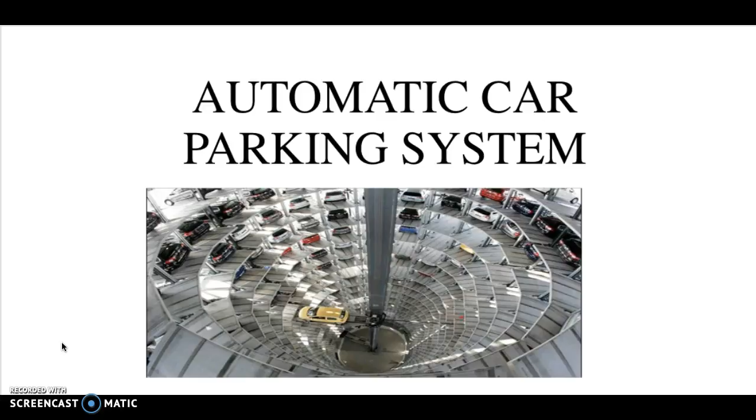Today my topic is automatic car parking system, which is useful for the present trend, and I want to go through the overview and the background.

In the earlier days there were different models like clamp, Parkism, multi-layers, used for parking, and it consumes a lot of space. The main motto of my presentation is I don't want to use a lot of space, just half the space is enough for a lot of cars.

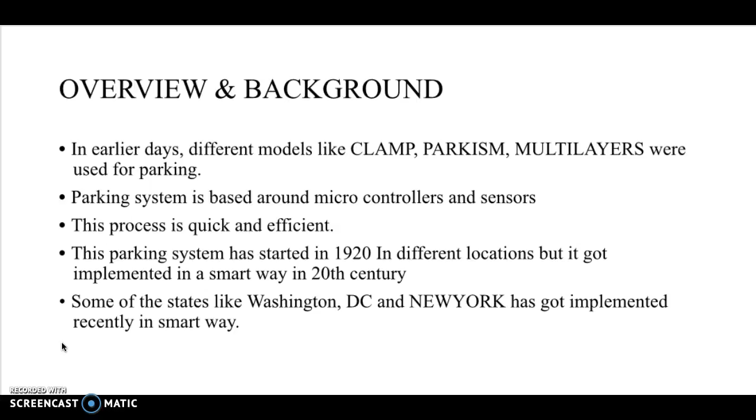This parking system is based around microcontrollers and sensors. This process is quick and efficient.

The parking system started in 1920 in different locations, but it got implemented in a smart way in the 20th century. But the automatic car parking system started just a year back, and it is slowly getting implemented now everywhere.

Some of the states like Washington DC and New York have implemented it in a smart way. If we talk about New York, it is a totally crowded area, so for sure it should get implemented, and it got implemented.

Organizations will be very happy with this parking system, because they are saving money. They're not taking a lot of space. Just half space is enough for them, and they can construct 5 to 6 floors. They can increase the floors depending on the space.

If you take some space, we can construct 5 to 10 floors. And if they have more money, they can construct more than 10 floors, and it is totally useful in the future a lot.

If you see some of the big companies like Microsoft, Wipro, Infosys, any company or university or organization, this technology is very useful for them.

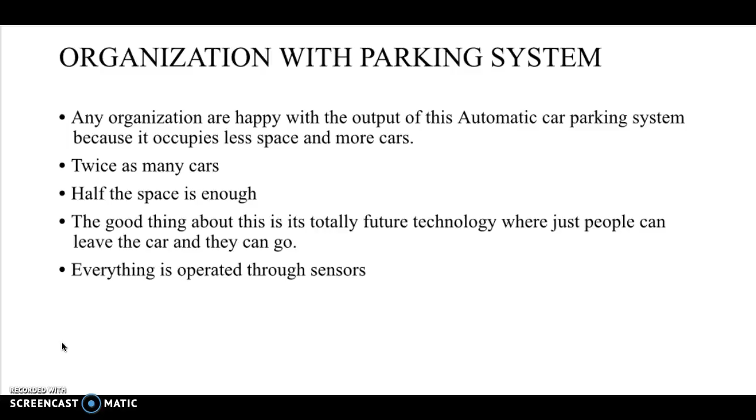It is time saving, and it will control the traffic. It is more useful for the customer who comes there. They will just park their car and go. So everything is done through sensors.

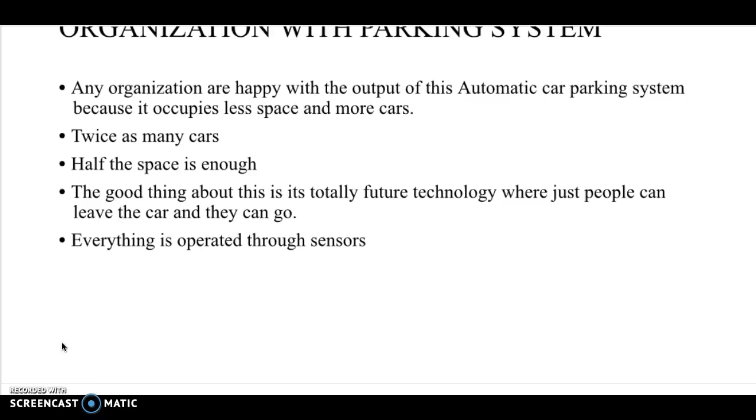I mentioned twice as many cars. If you take the ground level, only normal ground parking, we're taking a lot of space. So for that, only half space is enough, and we can construct more floors.

The good thing about this is it's totally future technology, where we can see some cars like Volkswagen Passat and BMW 7 Series which are totally automatic. This is the automatic car parking, so it goes through all the sensors and motors. Everything is operated through the sensors.

In the hype cycle, this now comes under autonomous vehicles, which will be reached in 5 to 10 years. For this, they will develop the implementation, the working and everything, and they should take the space and construct for everything. It will take almost 5 to 10 years.

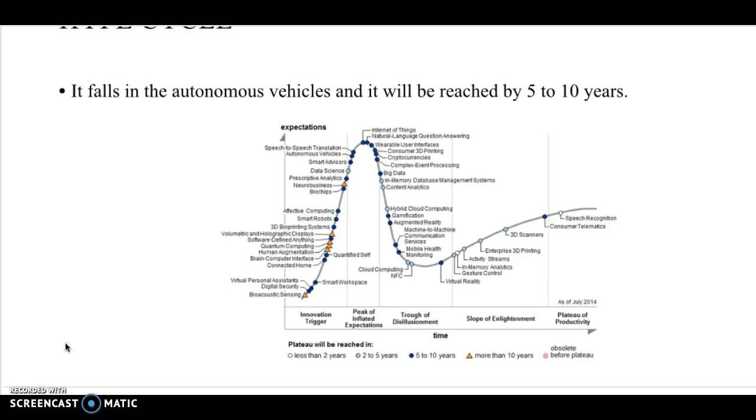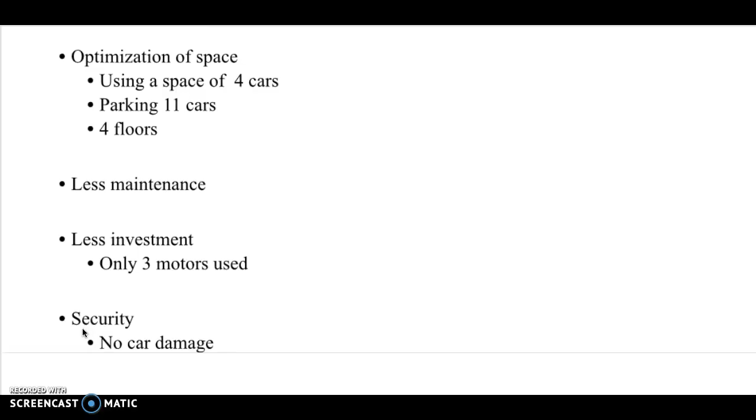If you're keeping any car next to another car, the car which is already placed should move to the empty space, and the car going to that position should move in. That is the reason we leave one empty space for the car. It has less maintenance, less investment, and only 3 motors are used.

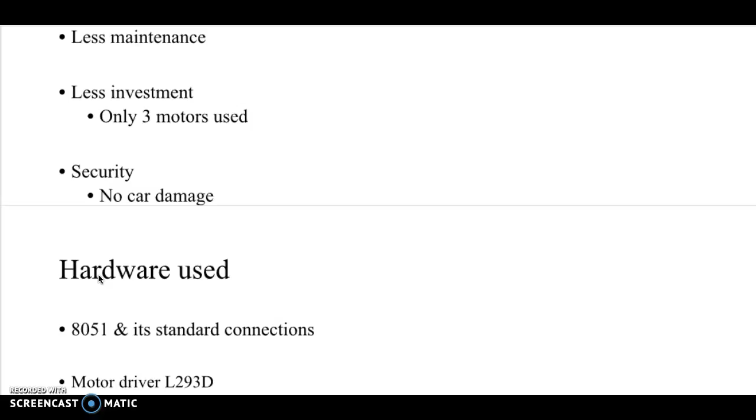Talking about security, this is the main term, because people will be worried that if they place their car and go, something will happen, like theft or car damage. Don't worry regarding that. We should not worry, because if the sensors or the motor fail, there is a backup for that. So no car damage.

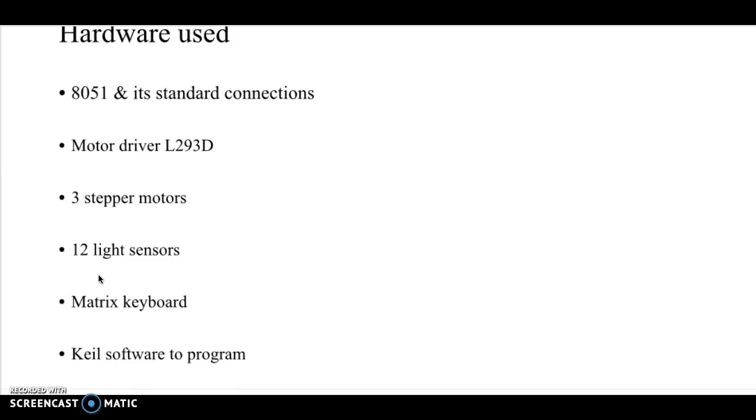Talking about the hardware, the 8051 microcontroller with its standard connections is used, along with the L293D motor driver, the latest one, 3 stepper motors, 12 light sensors, a matrix keyboard, and Keil software for programming.

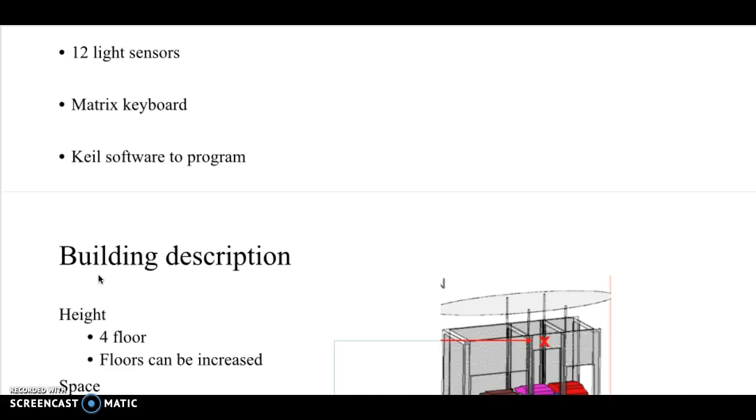This is the main software to run all these sensors, and if any malfunction occurs, this software is very useful. Coming to the building description, this is where the organization will be looking.

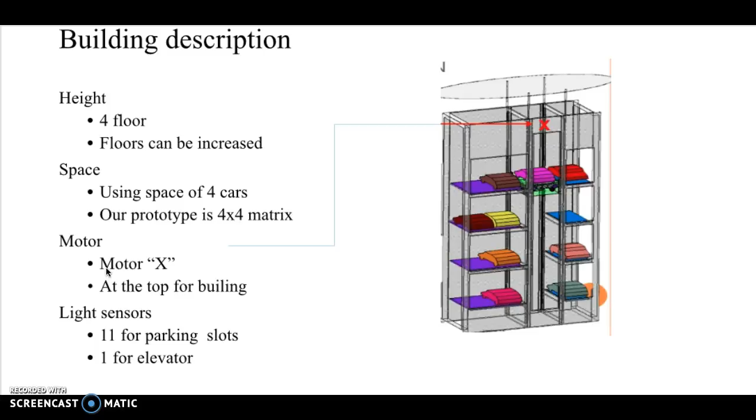There are 4 floors, and X is the motor, which runs depending on position. If we take it to the underground floor, the motor will be on top and it goes underground. If we take it to the top level, the motor will be at the bottom and it goes to the top. The light sensors: 11 for parking slots, 1 for the elevator.

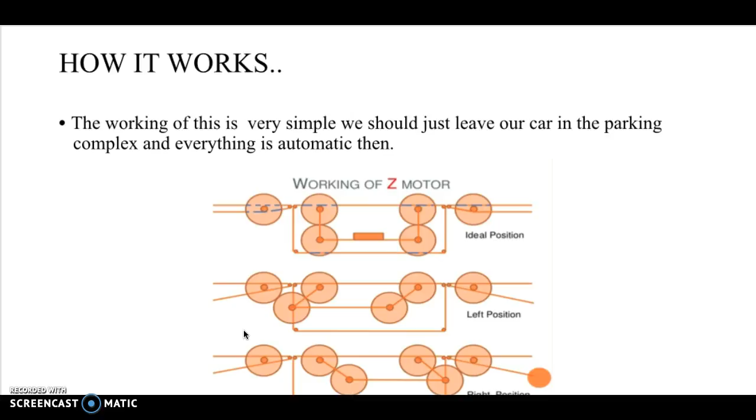The working is very simple and not at all complicated. The working of the Z motor: the first position is the ideal position, which is the normal position. The car is placed on top of the elevator, and under the elevator there is a motor. The second position is the left position.

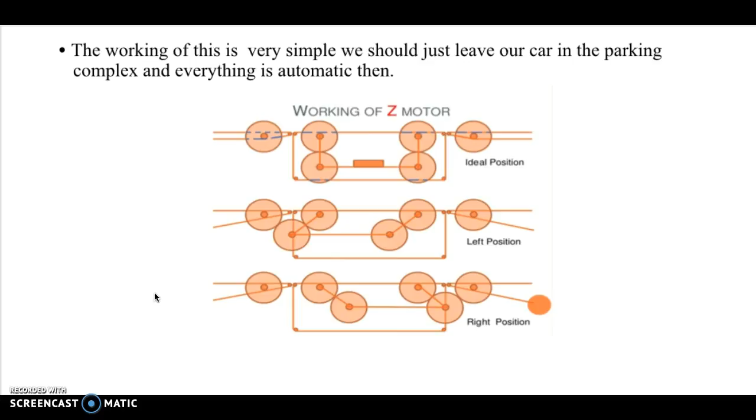The left position means that if the car wants to be placed into the left slot, the motor will turn to the left side and go into the left slot. If the car wants to be placed into the right slot, the position will turn to the right. This is the clear explanation for that.

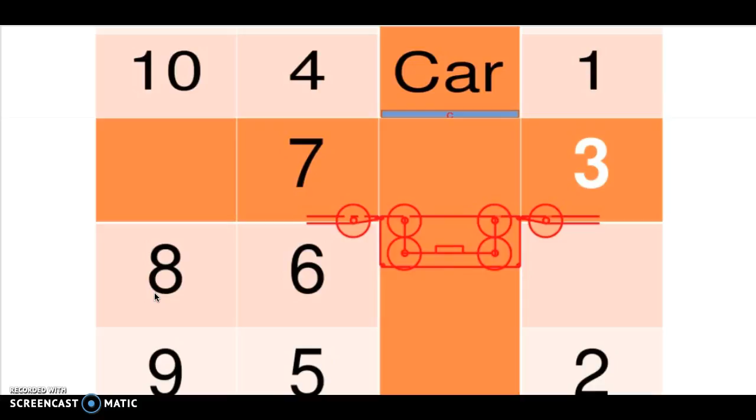The car goes to the top, and here it takes the left position. The car is at the bottom. First, the car at the 7th position comes to the elevator, and it is placed right next to the top of the second position.

Then the car waiting at the entrance is taken by the elevator and goes to the position next to the 7th. This is the reason I told you there should be one empty space to bring the car which is at any position.

Talking about the risks and costs, there are not many risks in this automatic car parking system because everything is through sensors and motors. If any problem occurs to the sensors or motors, there is a backup. There will be an additional motor if the main motor has any problem, and an additional elevator which carries the motor, so everything is operated there.

Talking about the sensors, if a sensor fails, there will be a backup. There are other sensors, and technicians will be available with a 24-hour response. So it is not expensive; it depends on the floors and space. If we construct more floors, the cost automatically increases, but not much compared to ground level parking.

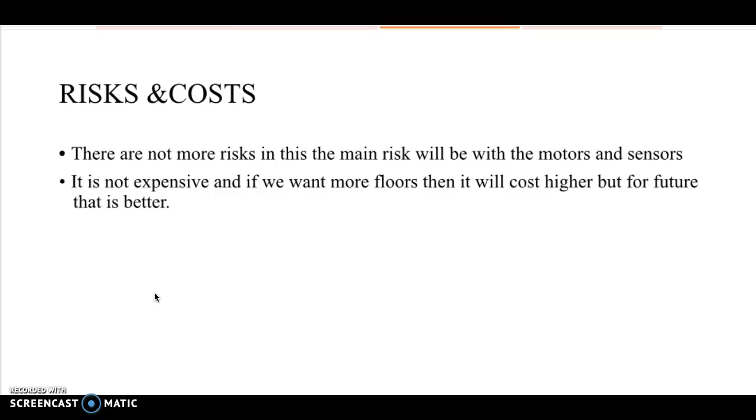The main thing we should see is time saving and traffic. This is the main problem people are facing everywhere. Coming to the operation, as I explained before, the operation totally depends on the motor and the sensors.

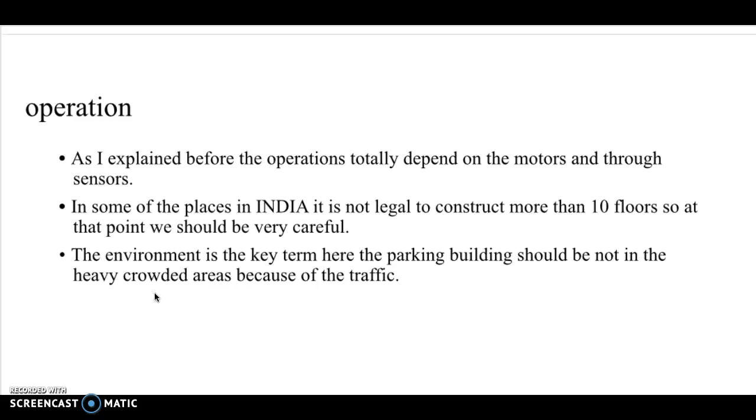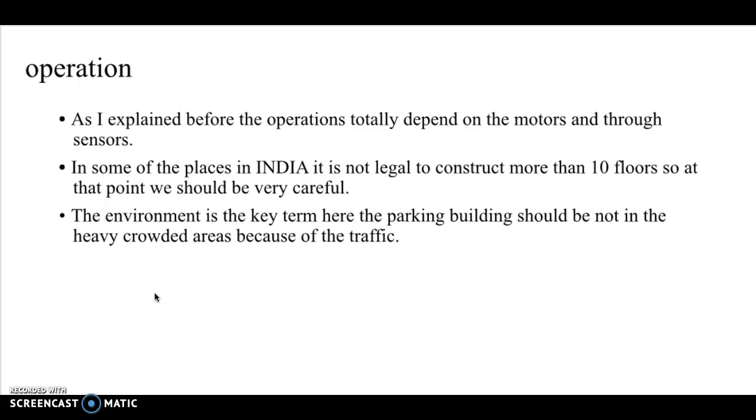In some places in India, it is not legal to construct more than 10 floors, so at that point we should be very careful regarding the legal terms. Talking about the environment, this is a key term, because this parking system should not be everywhere. It should be very near to the company so people will be comfortable, and it should not be in crowded places.

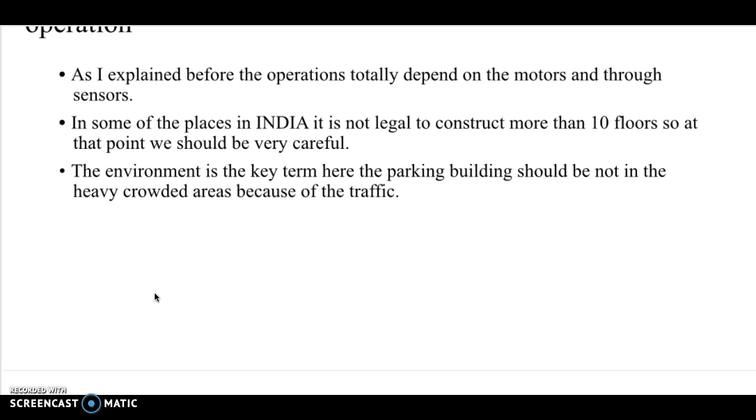The testing was already done. I just want to talk about some points regarding India. As I am from India, the testing part has been done there, in one city in the state of Delhi, and the testing has been validated with positive results. They started just 6 months back, so now they are growing.

The organization people will have so many doubts regarding sensors, like what kind of sensors are there, and whether they will have any damage or not.